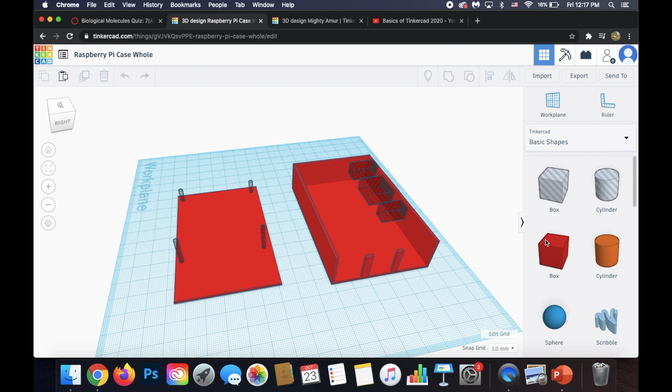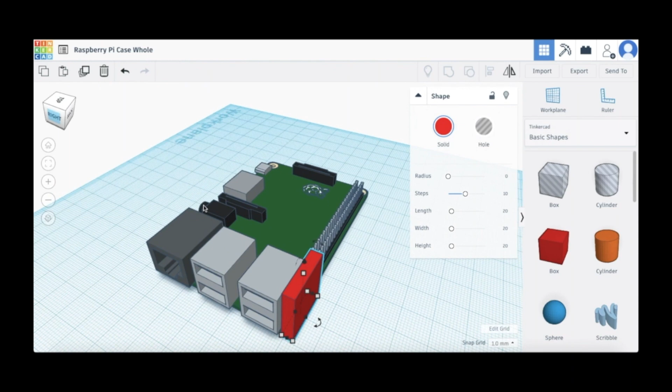In this video, you can see me taking the Raspberry Pi out and getting the basic shape of the box, and modeling around the components of the Raspberry Pi. I'm scaling everything to the size that would fit around it and around everything on there, and that's basically the entirety of how you do it.

So I'm going around everything here and just filling in all the spaces that need filled.

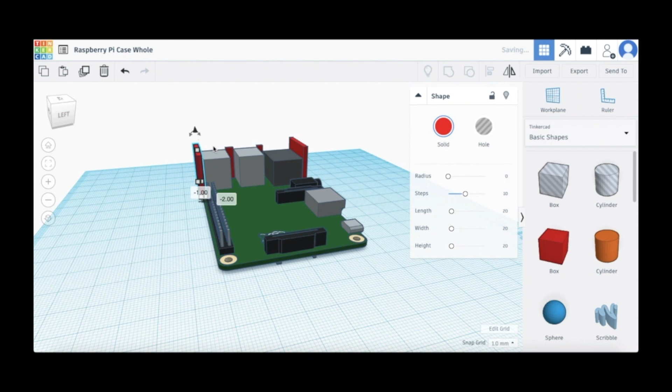As you see over here, I cover up those components that are sticking out. We'll get to that later with the transparent box and creating holes. So basically, it's just a lot of copying and pasting of what you need.

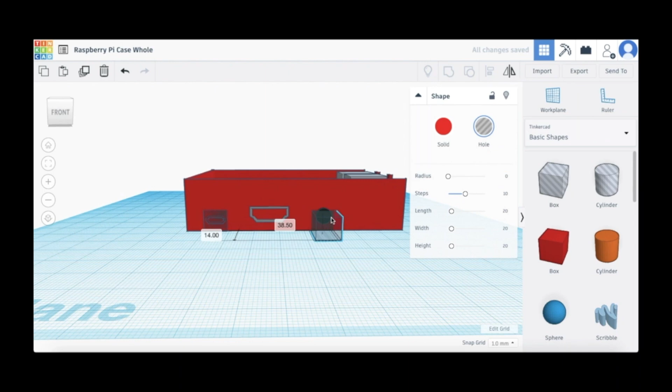So here you can see me taking the transparent box and using it as a hole to create a hole inside the actual regular box so that it will print like that.

Again, you can see me here copying, pasting, and rotating it 90 degrees to make the top of the box, so it will have a top.

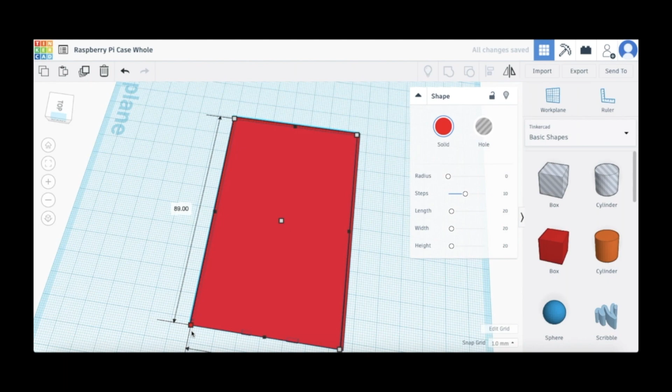Then I delete the model, select everything, and flip it over so it will print with the top of it on the bottom, so it won't print at 90 degrees.

Then I get the base, so where you're going to have the Raspberry Pi at. You can see me lining it up where you would have it in real life.

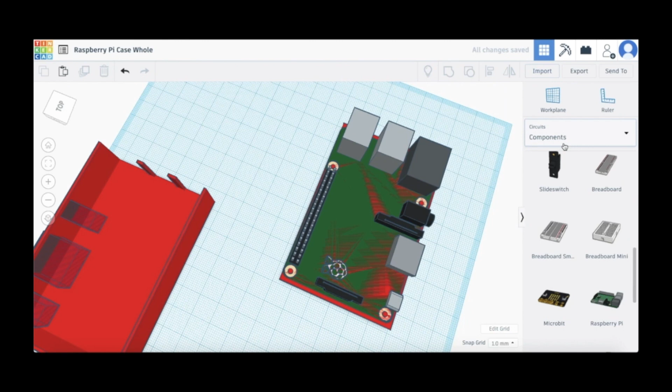And then, as you can see the screw holes there, this is where I take the transparent cylinder and line it up with the screw holes to make the holes where you screw the Raspberry Pi into the base.

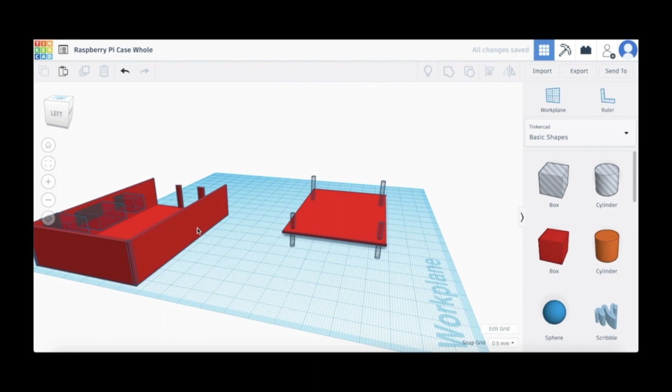I'm just lining them up here. And I'm taking them, selecting everything, and lining it up where it will be on the printer bed.

And basically, after this, you click that export button up in the top right, and you export it into an STL file, and then you take whatever your printing software is and transfer that file however you need to onto the 3D printer.

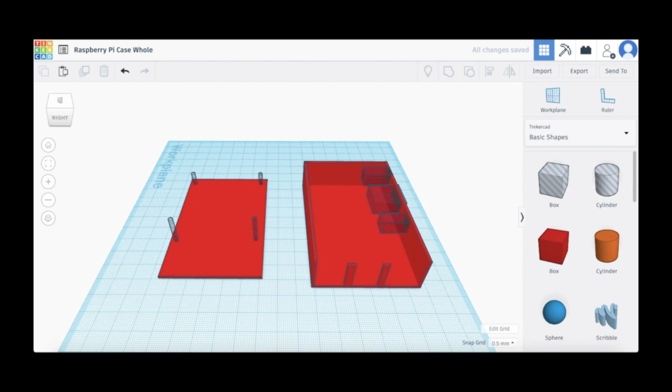So make sure all your settings are correct, and then you'll be able to print.